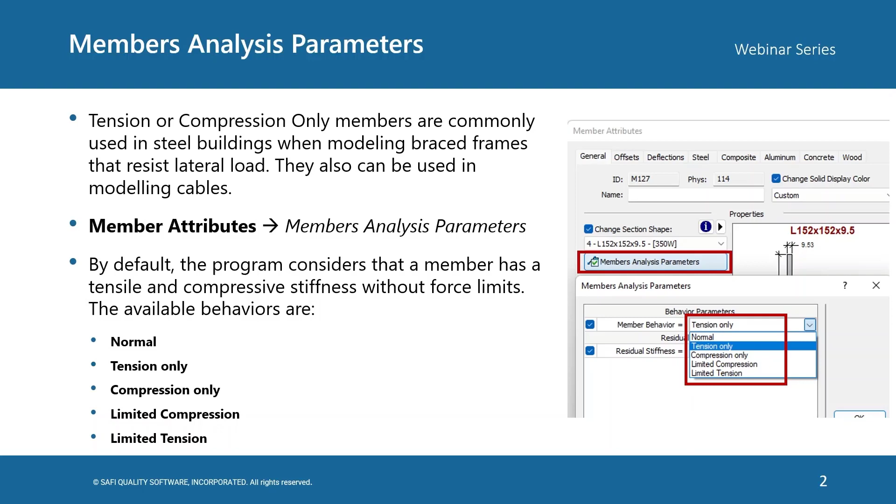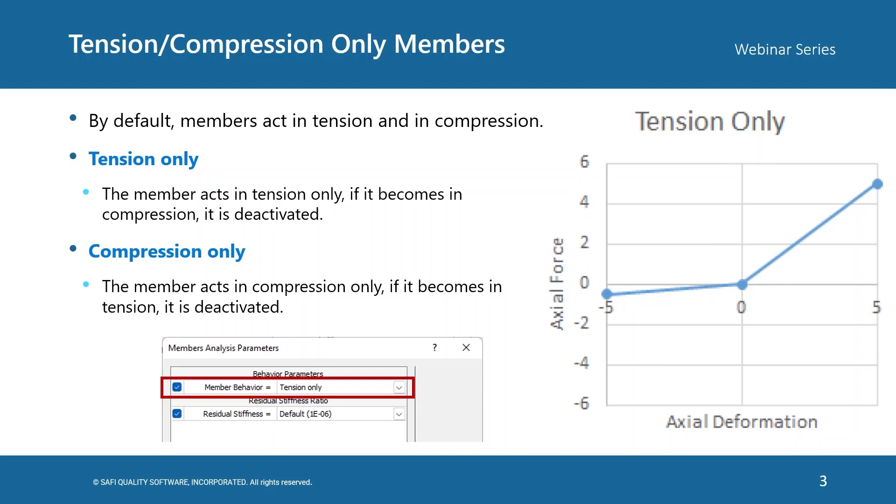In the program, by default, all the members act in tension and in compression. When a member is defined as tension only, if it becomes in compression, it will be deactivated. A member that is defined as compression only acts in compression only, and if it becomes in tension, it will be deactivated. If the selected behavior is limited compression or tension, the allowed force must be specified.

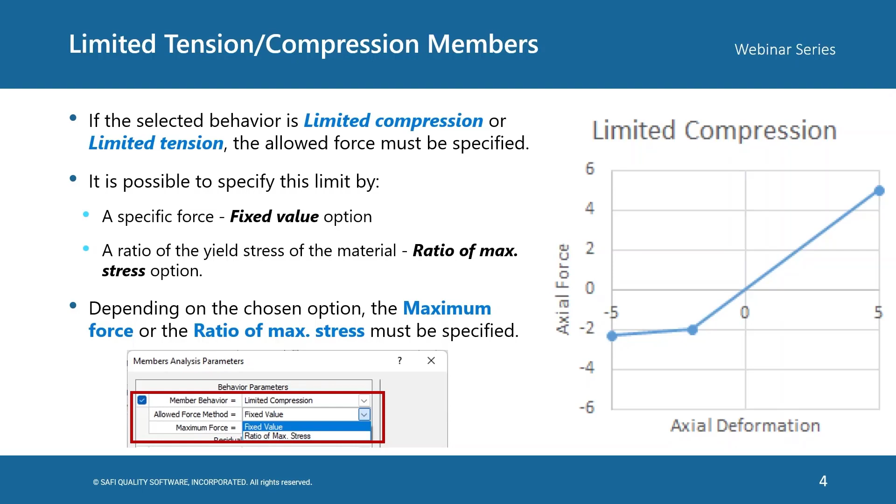It is possible to specify this limit by specifying a fixed value or a ratio of the yield stress of the material. Depending on the chosen option, the maximum force or the ratio of the maximal stress must be specified. When a one-way member is deactivated, it retains its bending and torsion stiffness. Its axial stiffness is reduced by the residual stiffness ratio.

The default value specified in the analysis parameters can be customized for specific elements. To customize this value for specific elements, we need to edit the attributes of a member, then we specify the residual stiffness in the member analysis parameters dialog box. When a member is deactivated, the internal axial forces in the member may be different than the intended allowed axial forces Fmax due to the residual stiffness.

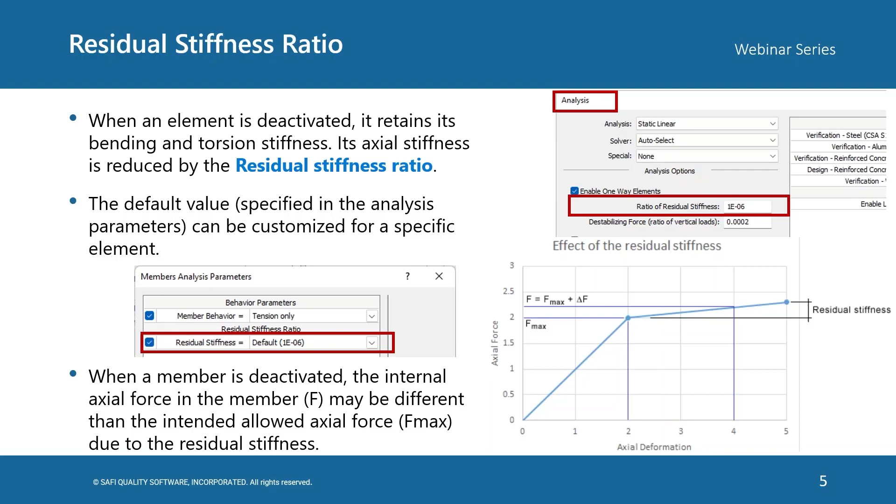Without further ado, let's start our demo. To define a tension or compression only member, the user needs to edit the attributes of the member. In the member attributes dialog box, the user needs to modify the member analysis parameters. By default, all members act in tension and compression. To specify a tension only or compression only member, the user needs to specify the member behavior.

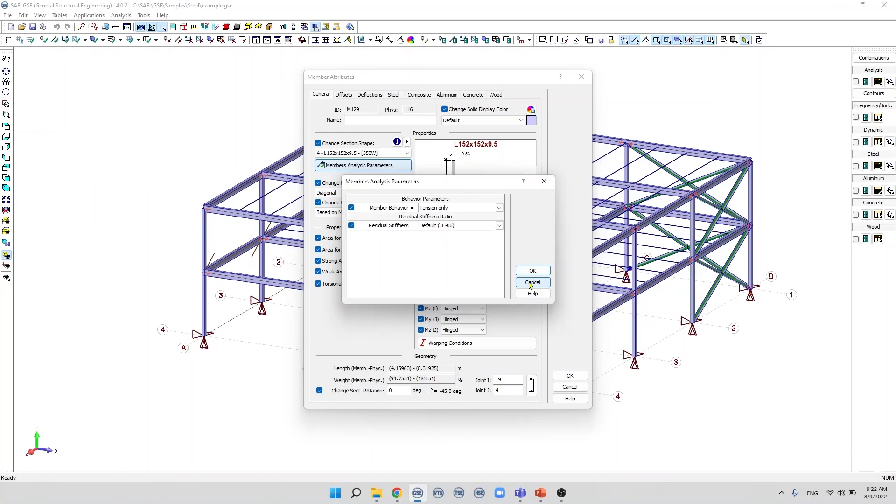When a member is defined as a one-way element, graphically, it will be displayed with a discontinuous green or blue line to highlight the specific behavior of these members. Let's run the analysis of this model. In the analysis dialog box, there is a checkbox where the user can enable one-way elements in the model. When this box is checked, the software will take into account the one-way behavior of the elements and the analysis will be an iterative analysis.

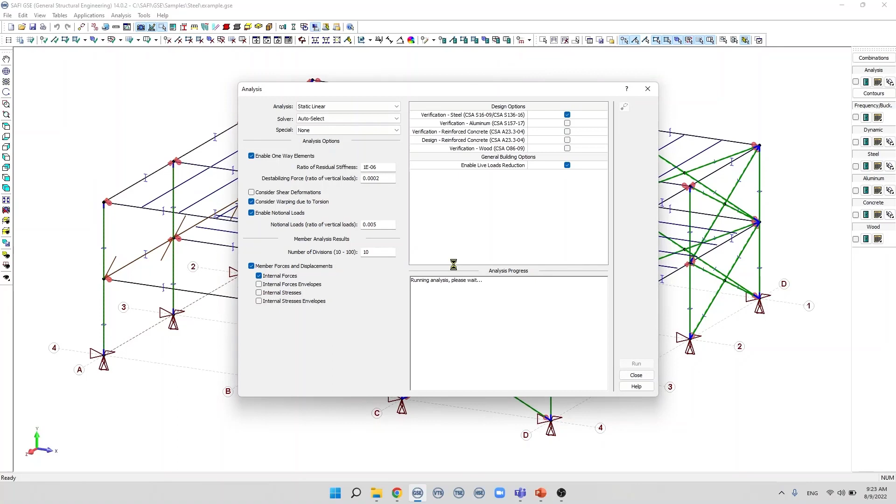In this example, we have a frame with two tension-only members. When we run the analysis, the user has the option to deactivate one-way elements by unchecking this box. This warning dialog box reminds the user that there are one-way elements in the model. We go ahead and click Yes. We display the graphical results and check the axial force Fx. In this model, we can see that this diagonal is under compression and this diagonal is under tension.

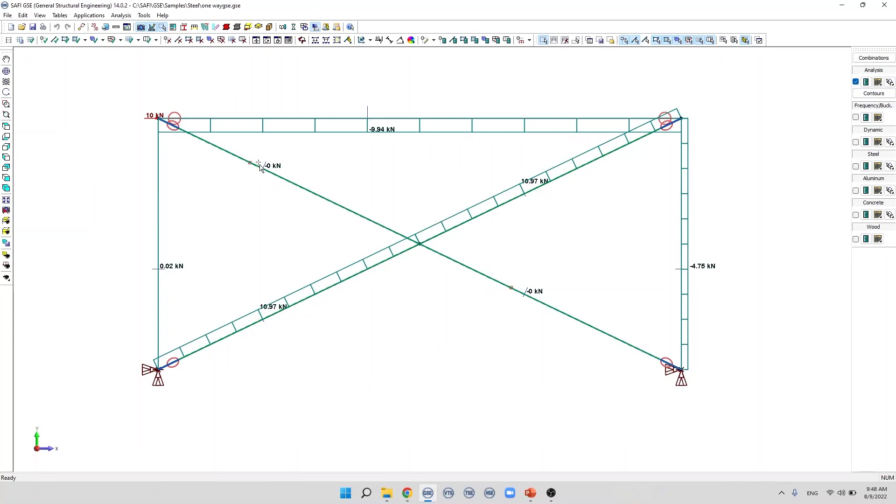Now let's run the analysis again, but this time we will enable the one-way elements. This time, we see that this diagonal is deactivated and the red box with the X inside appears. We can see the axial force is almost zero. The axial frame behavior depends on whether or not the tension-compression limits are exceeded at the end of the case.

When a member is deactivated during the analysis, we multiply the full axial stiffness by this factor, which is the ratio of residual stiffness. So we replace the axial frame behavior with a sufficiently soft spring, which simulates a zero stiffness. By default, this value is 1E-6, but the user can edit this value if the model isn't stable. If there are difficulties for the analysis to converge when we have tension-only members, the user can increase the ratio of the residual stiffness, which helps for convergence.

For this example, if we focus on the number of iterations the software needed to achieve convergence, I specified a residual stiffness of 1E-6, which gave a total of 6 iterations. Let's see when we specify a residual stiffness equal to 0. In this case, the number of iterations increased by a lot, and the total is now 16. This parameter has a direct influence on the rate of convergence.

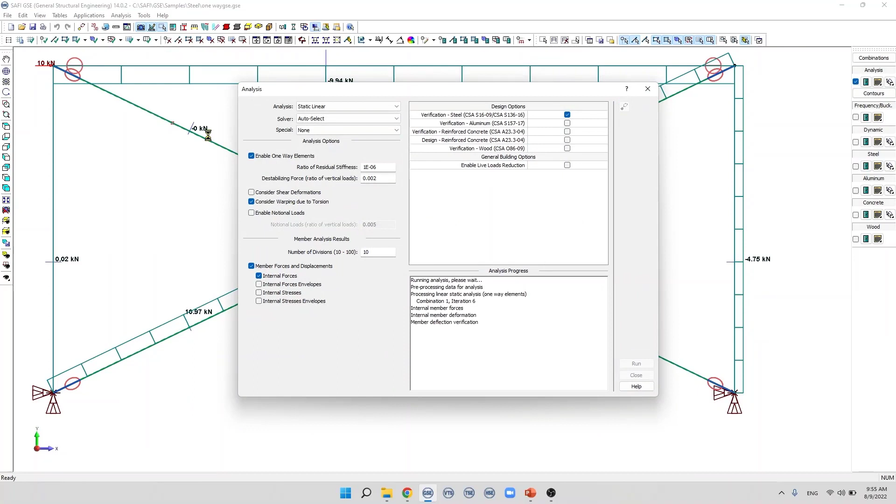We can also specify the behavior of the member as tension only, but allow some compressive force. In this case, we specify limited compression, and we have two options to specify the allowed force. The first one is a fixed value, so we specify the maximum compressive force that we allow. Let's put 1 kilonewton here and click OK. Then we run the analysis. This diagonal was deactivated when the axial compression force limit, 1 kilonewton, was attained.

Another way to specify the allowed force is by specifying a ratio of the maximum stress. Let's say we specify a ratio of 2%, or 0.02. This ratio will be multiplied by the maximum stress to calculate the allowed force.